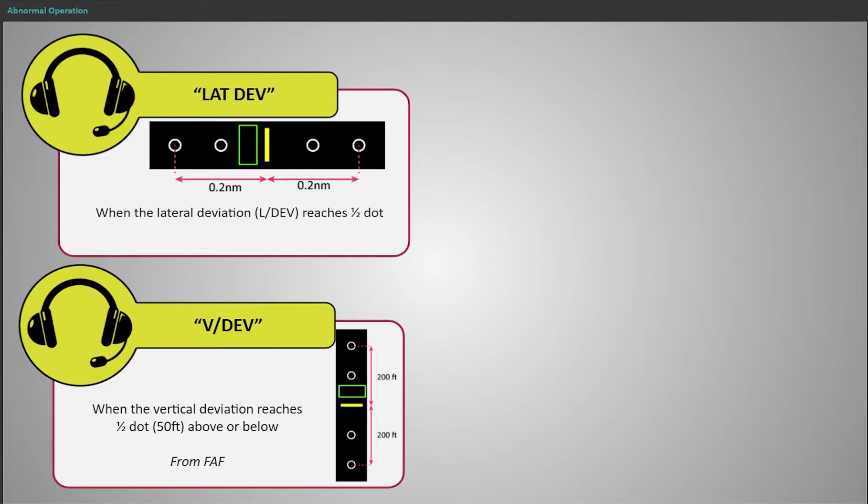An increasing LDEV may result from an excessive ground speed due to tailwind, or during engine out acceleration in an RF leg. In case of excessive IAS, it shall be reduced to a value appropriate for the position in the procedure. In case the speed is correct, the pilot flying shall analyse the aircraft and guidance behaviour, and if necessary take over manually and zero the LDEV deviation.

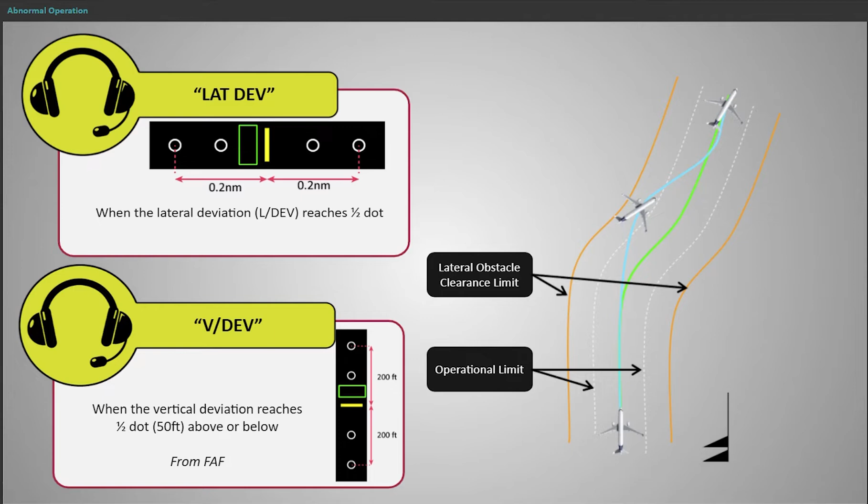When the lateral or vertical deviation approaches the operational limit, cross-track equal to the RNP value or vertical deviation 3/4 dot, the pilot flying must take action. During a RNP AR approach, a go-around must be initiated. During a missed approach or departure, the flight crew must analyse the situation and decide to stay on the current RNP AR trajectory with degraded navigation performance, or to revert to an alternative non-RNP trajectory or contingency procedure, which will be explained later.

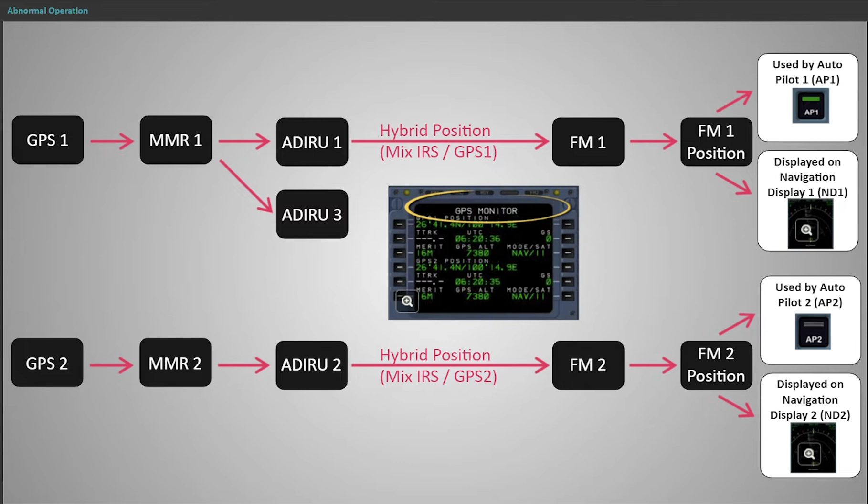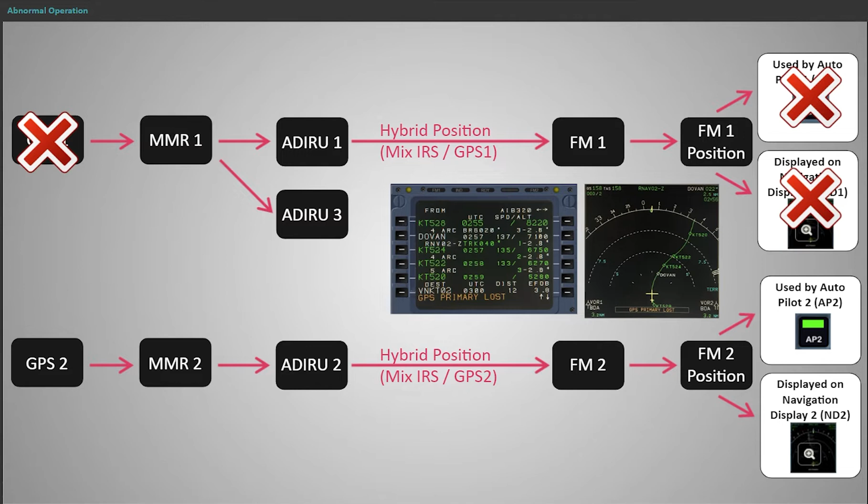GPS is the primary navigation sensor used in RNP AR operations. In case GPS primary lost is displayed on only one FMS, navigation shall be coupled to the remaining healthy FMS. RNP AR operation shall not be initiated in this configuration.

In the unlikely event of loss of GPS navigation, either due to a total loss of the GPS sensors or loss of the GPS signal, the FMS still provides accurate navigation based primarily on inertial data, coasting. In such case, an RNP AR approach shall not be continued, and reverting to a non-RNP AR procedure is recommended when available. However, FMS navigation can still be used for missed approach or departure procedures as providing the best available guidance.

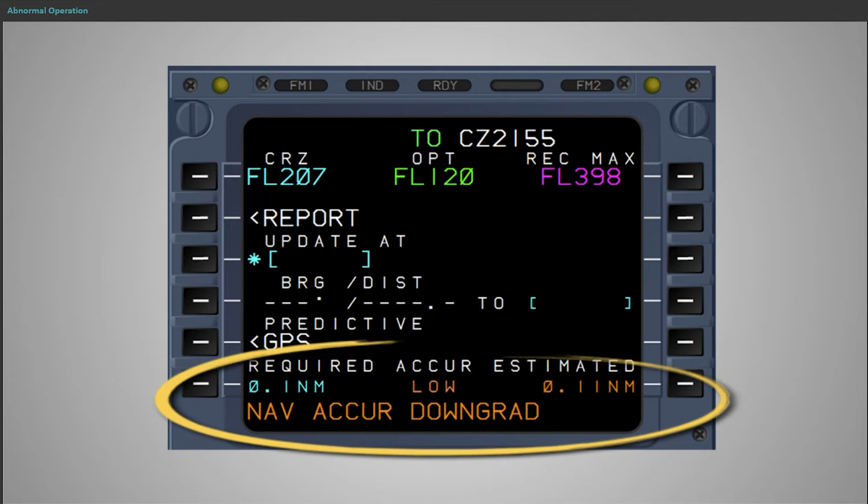The EPE can provide useful information on the actual navigation accuracy of the aircraft. Failures affecting navigation are associated with dedicated alerts in the cockpit. For lateral guidance, the last 3 alerts highlight a serious issue with the navigation capability of the aircraft, which is too complex to analyse, especially on final approach. Therefore, the crew should immediately initiate a company-approved contingency procedure.

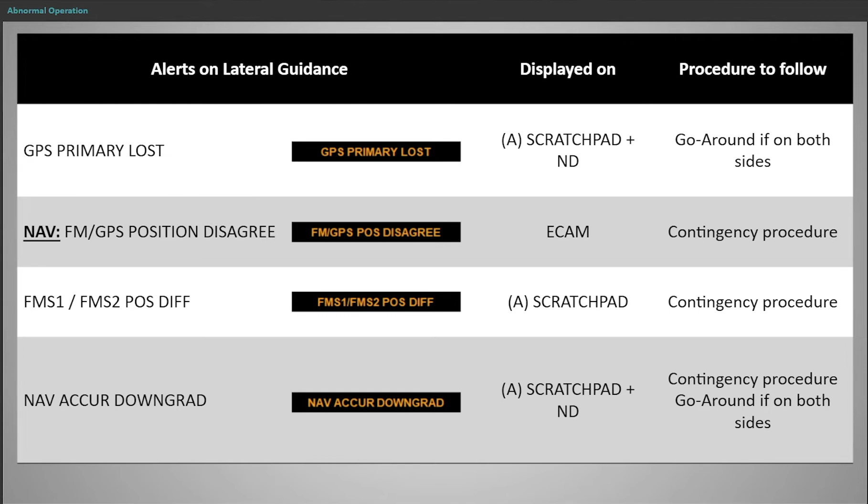For vertical guidance, RNP AR approach operations are based on Baro VNAV. If nav-alt discrepancy is displayed on the ECAM, or if a difference of altitude and/or VDEV is noticed, do not start the RNP-AR approach or perform a go-around.

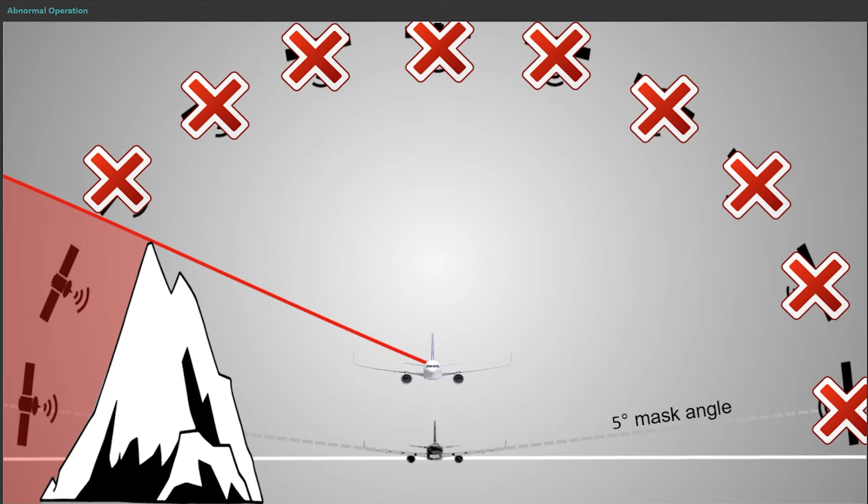In case of total loss of GPS signal or failure of both GPS receivers, the FMGC will only use the IRS data for position calculation. This is called coasting. It is only after around 7 minutes, when the integrity limit of 2 times RNP is reached, that the flight crew is advised with the amber GPS primary lost message on the ND.

Note, the accuracy is still fine until it reaches the accuracy limit of 1 times RNP. The flight crew is advised by the amber nav accur downgrade message on the ND and on the scratch pad. More information on coasting can be found in the ACD and the Airbus Getting to Grips document.

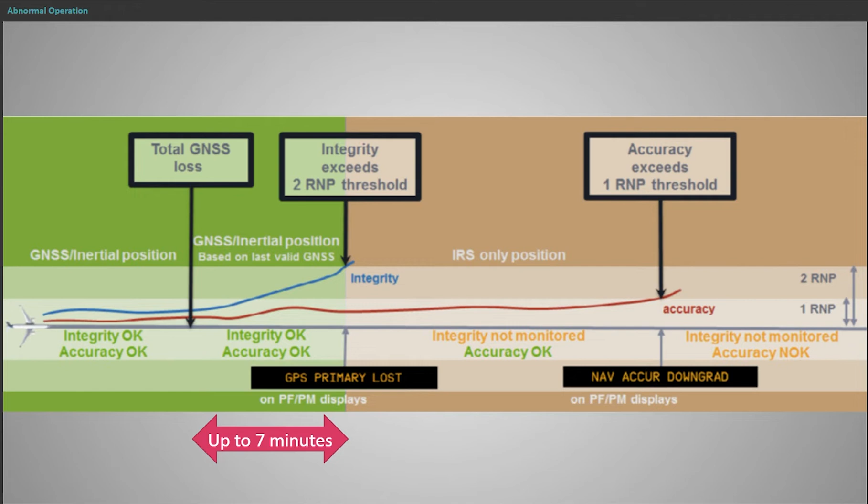So, we can now consider what course of action we should take when we have system failures. Guidance on this topic can be found here in the FCOM. The management of degraded navigation should be an integral part of the approach briefing. The approach may be continued in case of a single system failure.

For example, GPS, FMGS, EFIS-DU, MCDU, or AP.

The approach must be discontinued in the following dual system failure cases: dual GPS primary lost, dual nav accur downgrade, dual loss of FMGC or dual loss of final APP mode. Dual AP failure if procedure is RNP less than 0.3 nautical miles.

Final APP does not engage. FM, GPS, POS disagree. FMS1, FMS2, POS diff. Loss of GPWS terrain function. Inconsistency between aircraft position and terrain data. And nav-alt discrepancy.

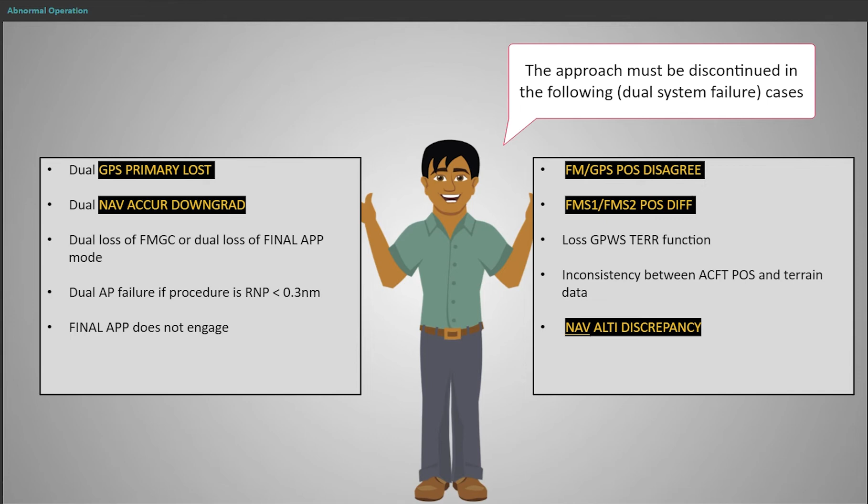In complex or very remote failures, such as a dual FMGC failure or total loss of FCU, the RNP-AR capability is lost and the flight crew has to revert to a contingency procedure.

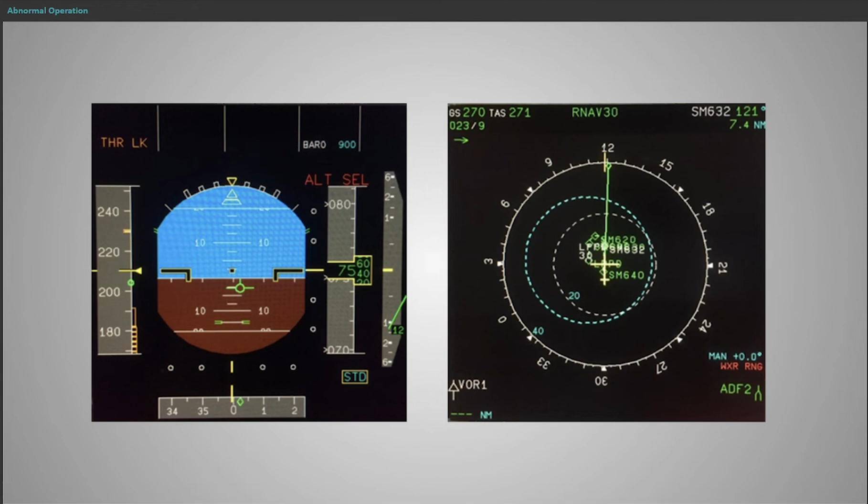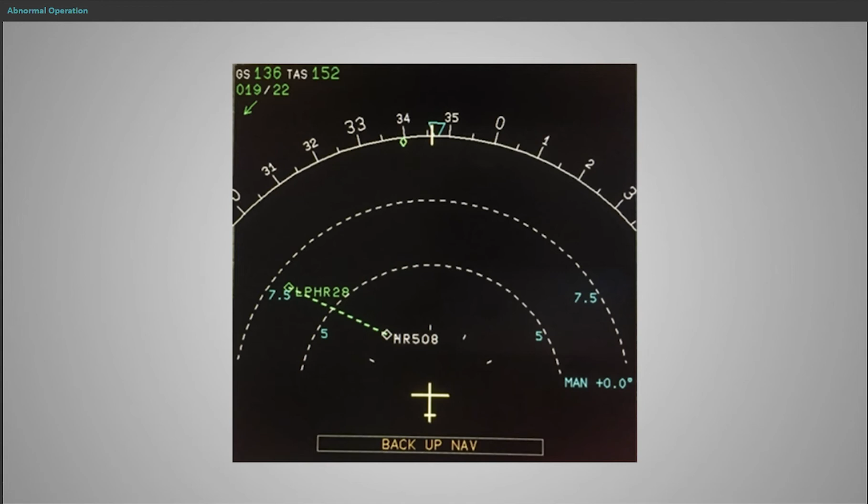This contingency procedure must be defined by the operator and can be generic or specific for a certain procedure. Examples of contingency procedures are requesting radar vectors from air traffic control, if available, using backup navigation, using backup tuning by using the RMP panels to tune specific nav aids, flying a specific heading until above MSA, using the terrain on ND by flying the black until above MSA.

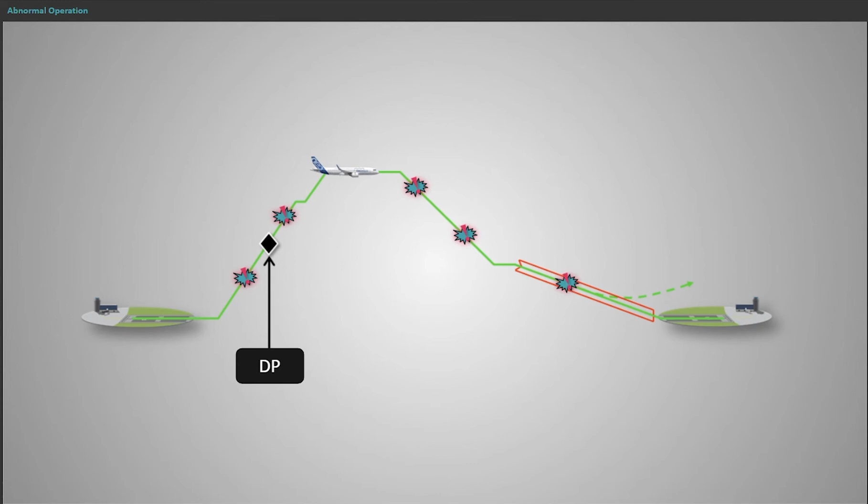On the following slides, we will discuss engine failure at different stages during an RNP-AR procedure. We will look at engine failures before the DP, after the DP, and during approach.

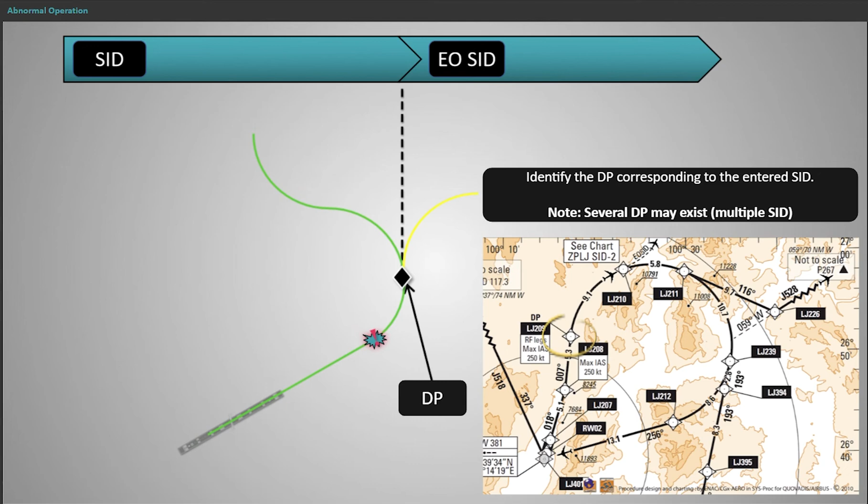Before takeoff, the crew shall identify the diversion points corresponding to the SID entered in the FMS. Note, several DPs may exist in case of multiple SIDs. In case of an engine failure before the DP, the crew's priorities shall be: 1. Fly. 2. Navigate. Before the diversion point, activate engine out SID via automatic temporary flight plan or via secondary flight plan activation. And 3. Communicate. Consider using toga, limited to 10 minutes.

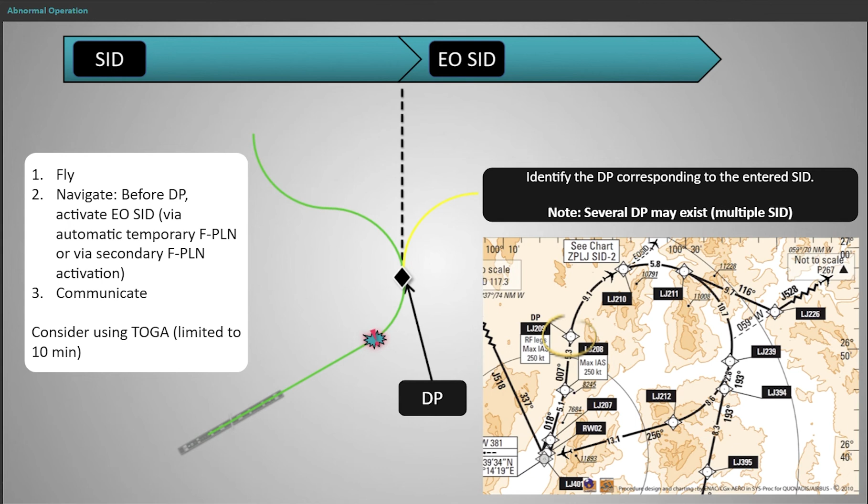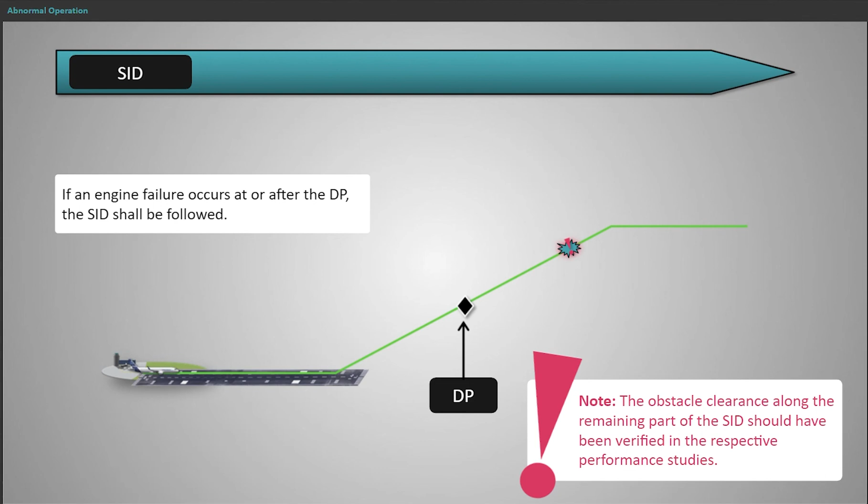If an engine failure occurs at or after the diversion point, the SID shall be followed. Note, the obstacle clearance along the remaining part of the SID should have been verified in the respective performance studies.

If an engine failure occurs during the approach, the use of final APP together with the AP might be restricted depending on aircraft type or modification. For RNP values below 0.3, the AP is required. Refer to the FCOM limitations section. Note, the approach may be flown manually if the RNP value is 0.3.

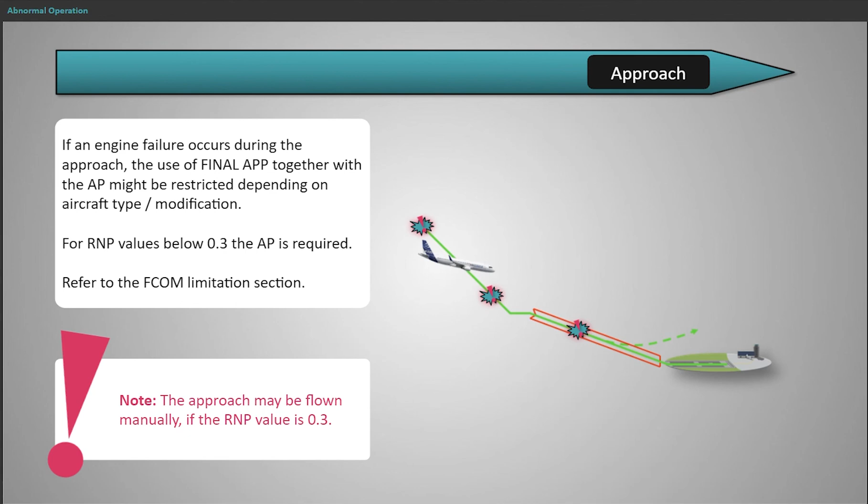We have now finished discussing some SOPs for abnormal conditions. Our objectives were to cover loss of RNP AR capability due to guidance, navigation, or system failures, and engine failure during approach and on takeoff.